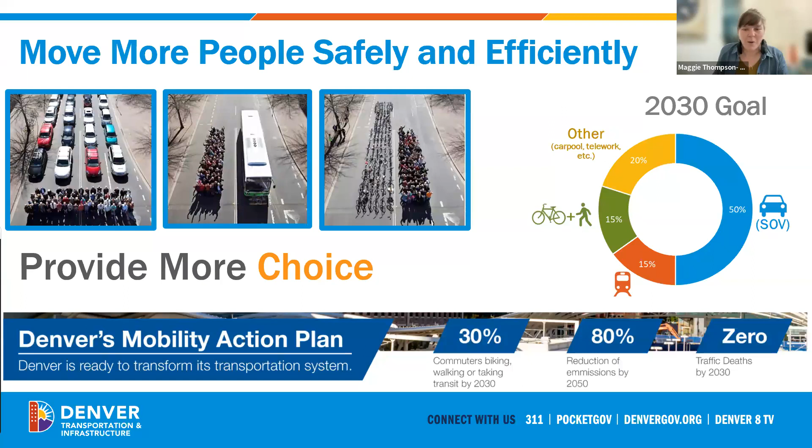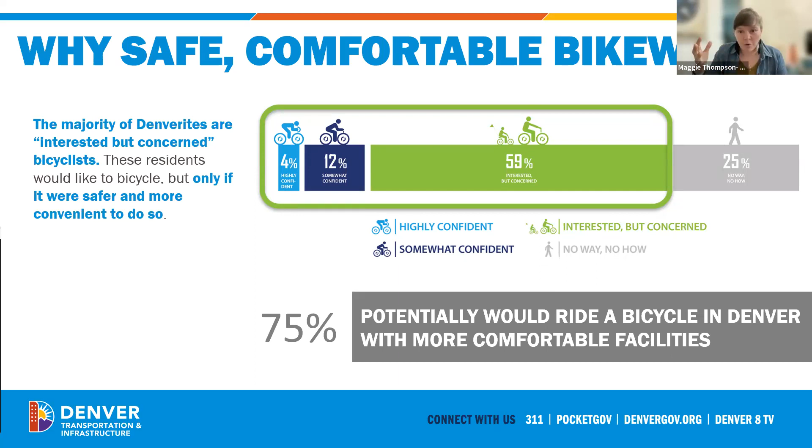So will Denverites bike? We're beginning to learn, and we've known this for some time anecdotally, but we're beginning to learn - yes. We have folks who are dedicated, I call them the hardcore bicyclists, they'll bike anywhere. We have folks who are somewhat confident, who are out biking today even though there are places along their route that might not be perfect and connected. And then we have a big pool of people - maybe that's you, maybe that's your neighbor who just got an e-bike rebate from the city and wants to cruise around on the weekends. But there's a group of people who would love to get out either recreationally or for transportation, but they're cautious because they really feel most comfortable on a truly dedicated bike facility. So we're hoping that through these programs we can get to those points and make these roads safe for everyone, whichever mode you choose or need to use.

So again, why are we building these? We're trying to create a transportation network that is safe for everyone. We have the goal of zero fatalities through our Vision Zero program. And we all know that's not the case today, that there are fatalities on our roadways for all types of users. Our hope is to get to a point where we can eliminate that.

We're also trying to prioritize these multimodal projects, making sure that we have more places for people to walk, bike, ride, and take scooters through our communities to benefit both their health and congestion around the city. We want to increase options for people.

We want to help folks who maybe want to go down to one car in your household, so you can afford to go on that cool vacation this year and ditch the gym membership, and one person starts to bike to school or work to reach those goals and manage our traffic as the city grows.

And then we'd love to improve access. We want to make sure for folks who maybe don't have choices, maybe for financial reasons, you need to take transit, you need to walk, you need to take the bus, we want you to have options, and we want those to be safe options.

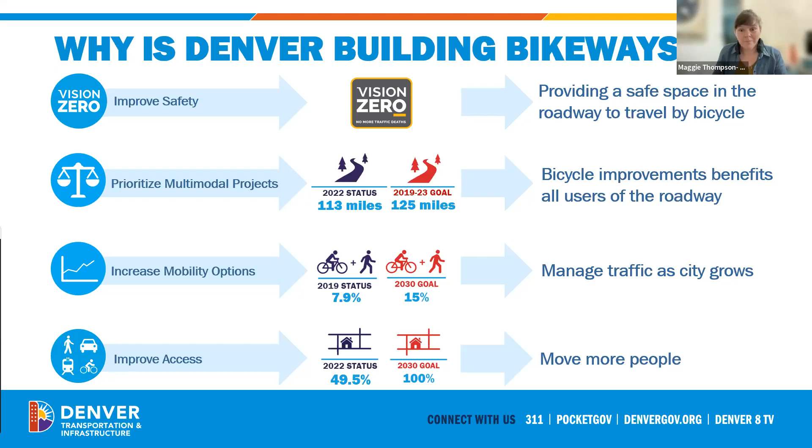Next slide please. So we've gone through many years of different plans to choose the places in our city where we're putting in these types of facilities. We'll go a little more into the areas we've chosen in particular for these facilities in a few minutes, but know this is not something someone threw a dart at a map. We've been working on this for a long time, and we have a lot of great people working to create that network and create connections throughout the city.

And we're at a point right now where if you live anywhere near Uvalda, the paving is coming, I promise, but paving season has begun. So we've got our crews out there putting down fresh roadway, and we want to be efficient and good stewards of your tax dollars.

And as we find places in our plan that we're getting ready to do paving on, we want to go ahead and take that opportunity to change the layout of that roadway and add in those new facilities we have planned, because it saves us money and time and energy down the road, where we're not scraping things off and putting them back down again.

So again, paving is this great opportunity. Each year we have between 400 and 500 miles of roadway that get repaved. My street got repaved last week, it's nice and shiny and new, it looks great. And it's a key component to keeping our roads safe and to adding in these facilities as we see the need going through the year in our paving program.

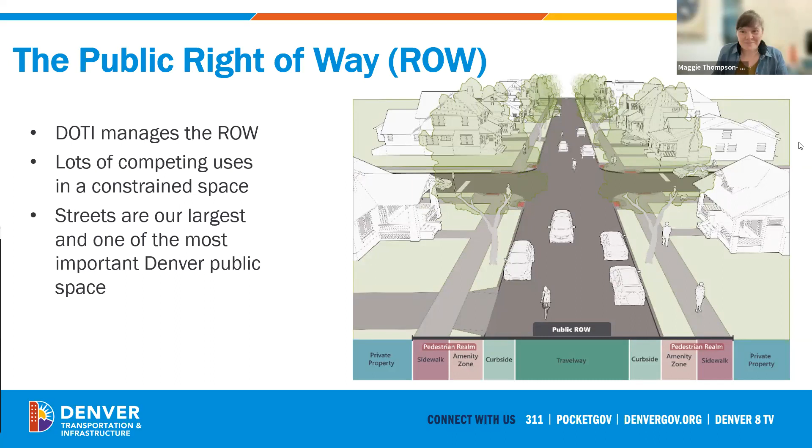All right, so I'm going to pass it off to Wesley now to give you a little overview of what our plans are for Uvalda.

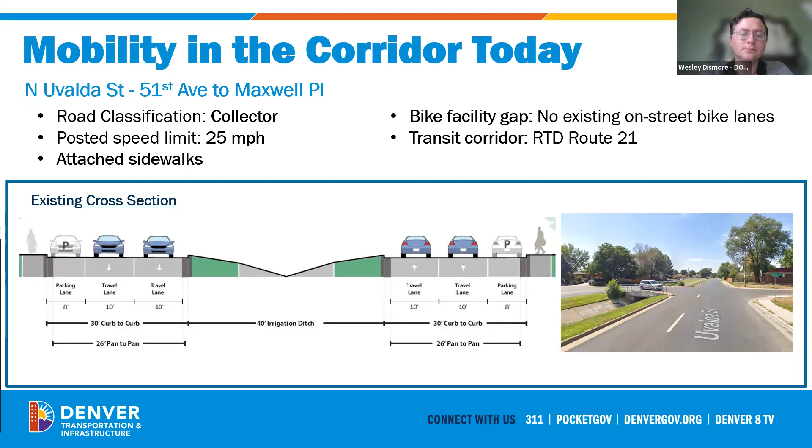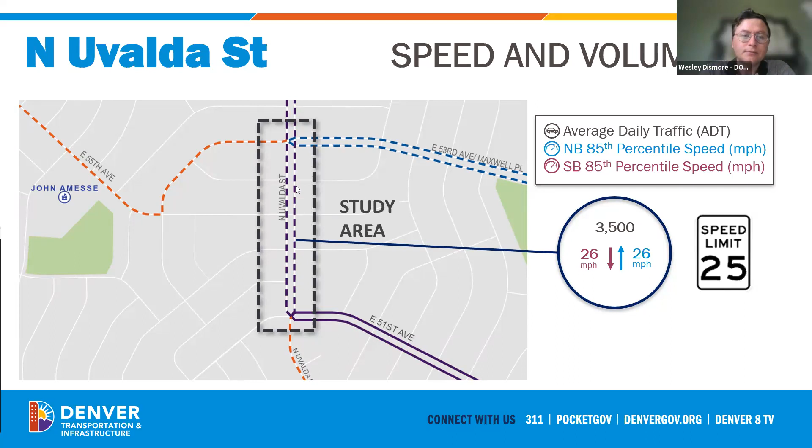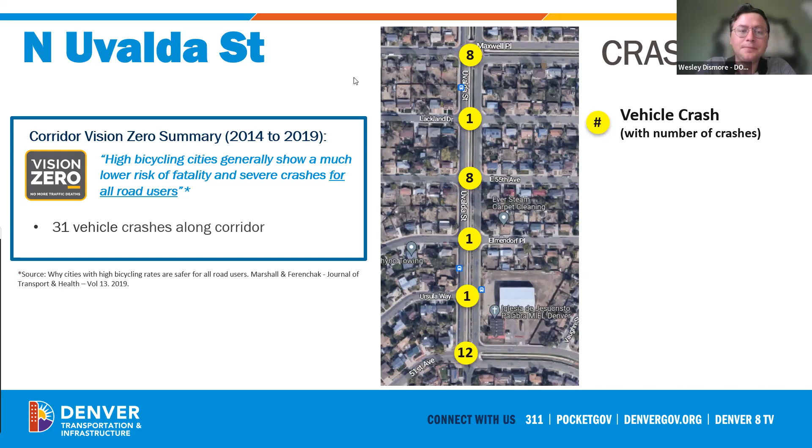In this case, because we have a lot of extra space out on the road, we have elected to install a protected bike lane to provide extra protection for bicyclists using the facility and maintain safety and comfort. Since there's a lot of room out here on the road, we're not going to be losing anything additional by adding that buffer, or adding that protection in the buffer.

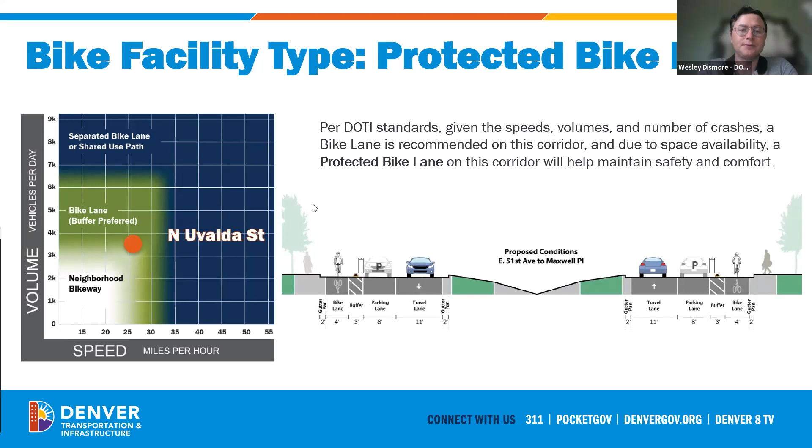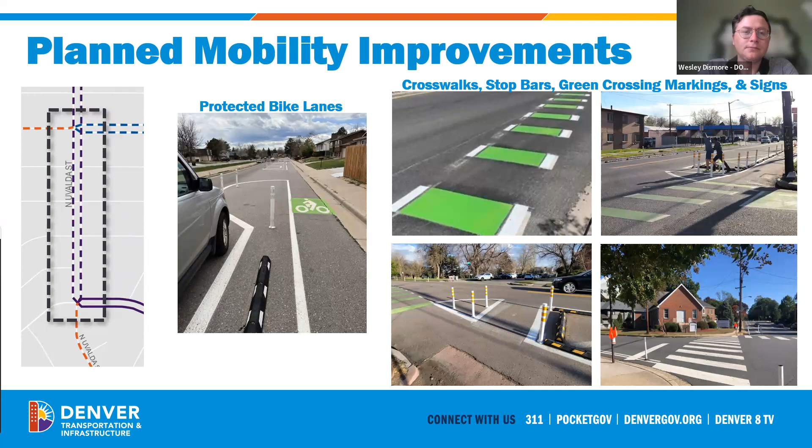Okay, so that's Uvalda Street. If you do have any questions - oh, I see Maggie's got a hand up. Let's take a second for Maggie.

I just wanted to chime in on one thing, because one question folks might have is why aren't we doing the top portion of Uvalda to get all the way to the great new facilities up at 56th. You may have heard that the stormwater program in the city is doing a significant program, so from Maxwell North to 56th, that section is going to get a significant rebuild, primarily to improve the way water flows through the area during storms. But the entire roadway is going to get rebuilt during that, and they're going to continue what we've done on the southern section all the way to the north.

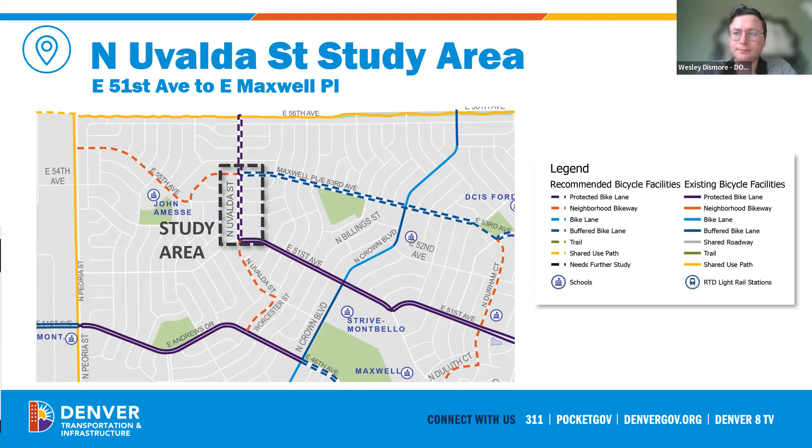Okay great, so that's the first of two project areas we wanted to talk about tonight. The other one is Kittredge Street between 53rd Ave and Green Valley Ranch Boulevard.

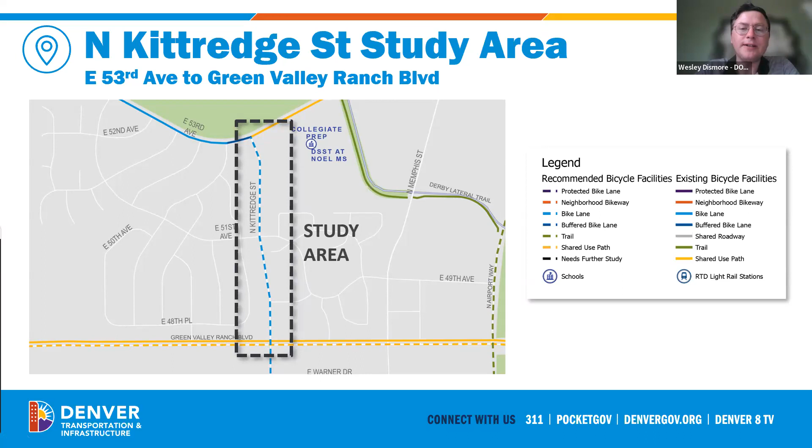Here, just like with the other corridor, we see a map of the study area. Kittredge Street is the dashed blue line in the middle of your screen. Again we have our legend showing proposed and existing bicycle facilities. Since Kittredge is a dashed light blue line, that means it's proposed as a bike lane.

Here's mobility in the corridor today. Kittredge Street from 53rd to 51st Ave - this one has two pieces. Again we talk about a road classification of a collector, a medium road, not as big or small as some other roads. Same posted speed limit of 25 miles an hour, detached sidewalks instead of attached at this point. Again, no on-street bike facility, and there is a transit route on this street.

In the lower right-hand side you can see a photo of the street as it exists today, and in the lower left-hand side our example cross-section showing the width of each lane.

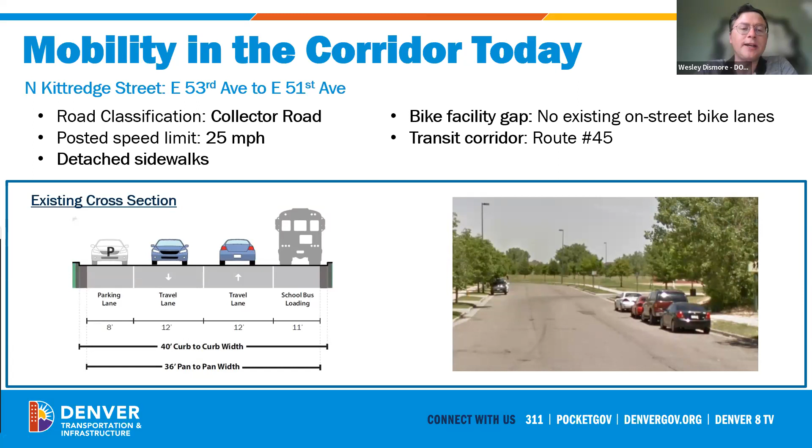This is mobility in the corridor today on the southern block between 51st Ave and Green Valley Ranch Boulevard. A lot of the details at the top are pretty similar, but you can see at the bottom there is a grassy median and two travel lanes in each direction, so the cross section is a little bit different here.

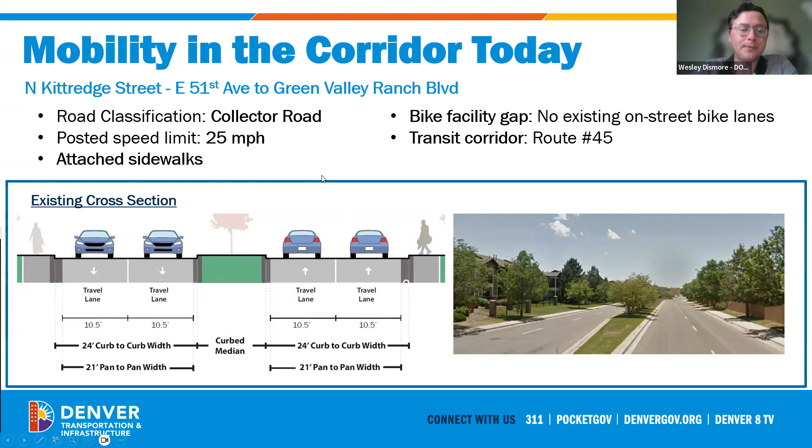Again with this corridor, as with the other one, we go out and collect data. The volume is actually quite similar to the other corridor at 3,200 vehicles, but the speeds are a little higher - 29 miles per hour each direction instead of 25. So we know we have speeds a bit higher than we want on this corridor.

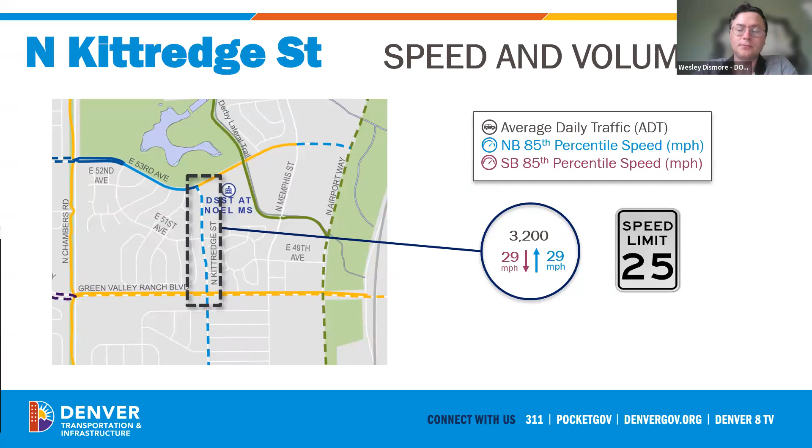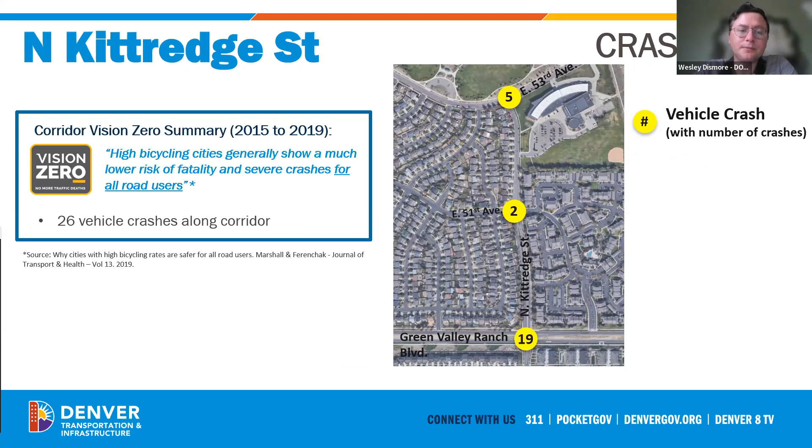This again should look familiar - this is our proposed bike facility type and proposed cross sections. On Kittredge Street, our facility selection chart shows another familiar orange dot showing speed and volume. Just like with Uvalda Street, we find ourselves proposing a bike lane with a buffer preferred.

If you look at the cross sections on the right, you'll see one section of the road - the south section between Green Valley Ranch Boulevard and 51st Ave - is wider, so we have more room for a bike lane and buffer while still maintaining a travel lane in each direction. On the north part, between 51st Ave and 53rd Ave, we have a narrower street that doesn't have as much pavement to work with. So to maintain both bike lanes, both travel lanes, and a loading zone for school buses for the adjacent school, we have to lose that buffer.

So we have a partially buffered bike lane on this facility, which is really the best option for us in this situation because of the limited space we have out on the roadway.

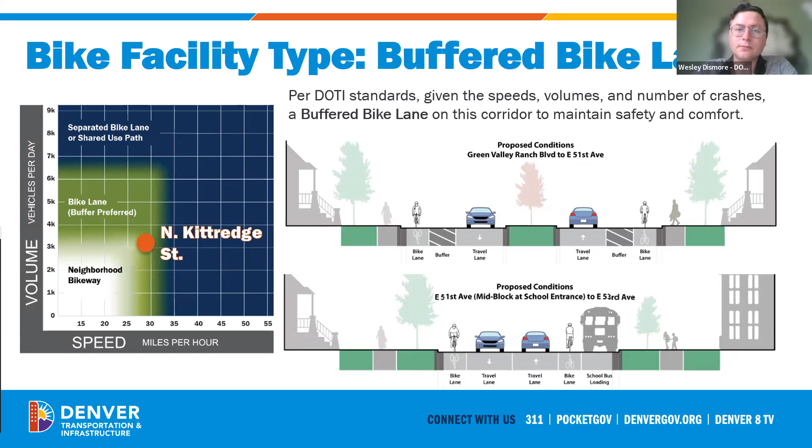Here are a few more of our planned mobility improvements. Some of these might look familiar. We'll have some more of the green crossing and conflict markings for bikes on the left, and we'll have both buffered and conventional bike lanes, which you can see above.

On the lower photos, we wanted to include these because we know that there are additional improvements planned for the intersection of Green Valley Ranch Boulevard and Kittredge Street, which will be part of another project to install a traffic signal there. We've grayed out these photos because we know those improvements aren't happening yet—they'll happen once the traffic signal is built.

The city is still working on determining a source of funds to get that traffic signal and the improvements on Green Valley Ranch Boulevard installed. So that's still a to-be-determined situation, but we wanted to show at least a little bit of an image of what we're going to be working with.

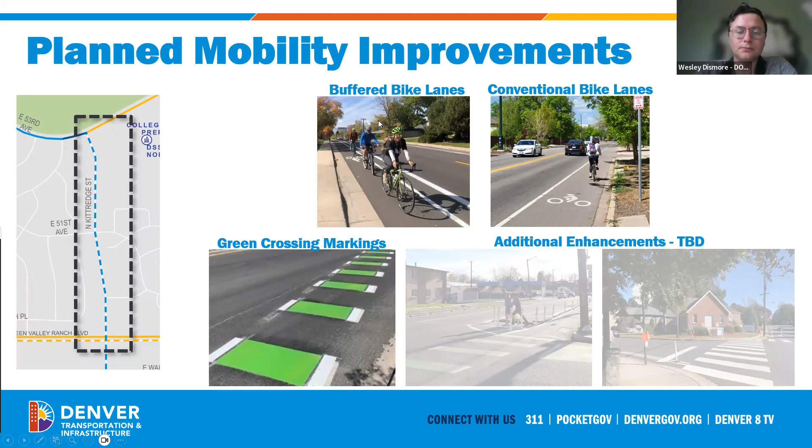All right, last but not least, some more of the project benefits. Again, you can see the yellow people on bicycles on the north and south ends of the corridor, showing that this Kittredge Street project will connect multiple proposed and existing bike facilities, continuing south on Kittredge, on Green Valley Ranch Boulevard, and on 53rd Avenue. There are also purple stars showing the different amenities or destinations in this area that the bike facility will improve access to.

I'll mention again the traffic calming effect—as you saw on the other slide, we have higher speeds on this corridor. So we're installing a bikeway which will help narrow the road and reduce the speed drivers choose, helping people abide by the posted speed limit on the street.

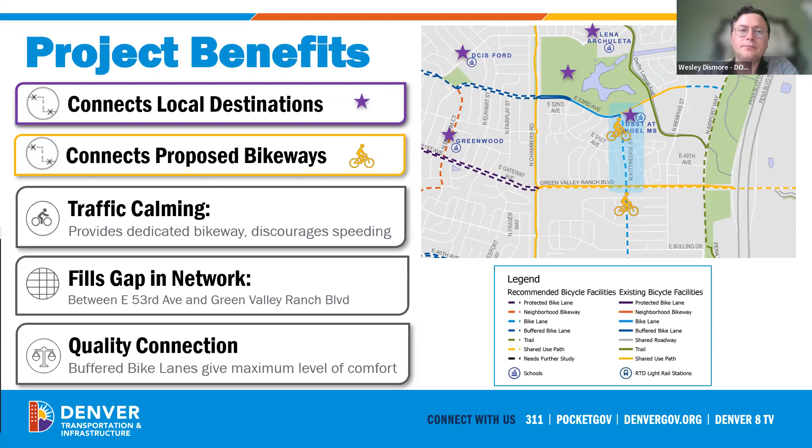So that's all I have to say about Kittredge. Again, we will pause in a moment to take questions. But I wanted to take one moment to talk about what we call our plan-to-project timeline.